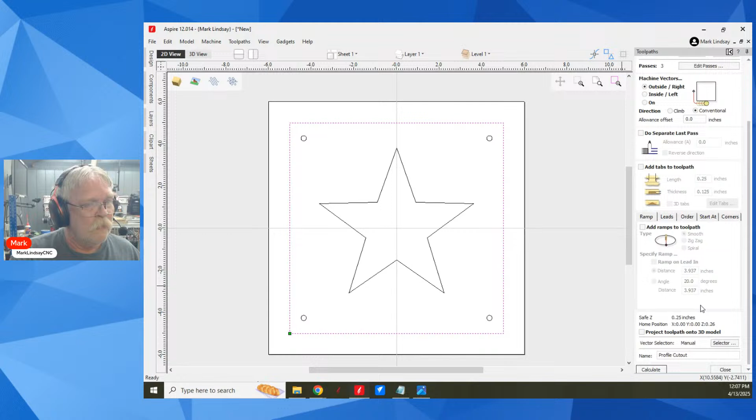And I may do ramps. I am going to check to make sure that I have sharp external corners checked here. That's important. Okay. I may or may not add ramps. Sometimes I do. If I do a separate last pass, I always add a smooth ramp. Okay. So that's what we're going to do. That's all of the tool paths involved in this simple pattern.

Now, in grouping tool paths, you can do them in several ways. Well, there's a couple of ways. One is you can take all of the tool paths here in your toolpath list, and you can group them based on, well, the criteria can be your own, more or less. You can create a group that uses, for instance, they all use that 1/4" end mill. I've got 1, 2, 3 different tool paths that are going to use that 1/4" end mill.

So what I can do is down here in the blank space, I can right click and I can create an empty group. So I'll create that group right there. Now, there is a check mark, meaning that this is a visible group, but there's nothing in that group yet. But I can come along and I can drag my drill toolpath into that group. And you see how it comes down here and it shows the drilling toolpath is now moved into group 1, it says. Then I can take my clearance and I can drag that in.

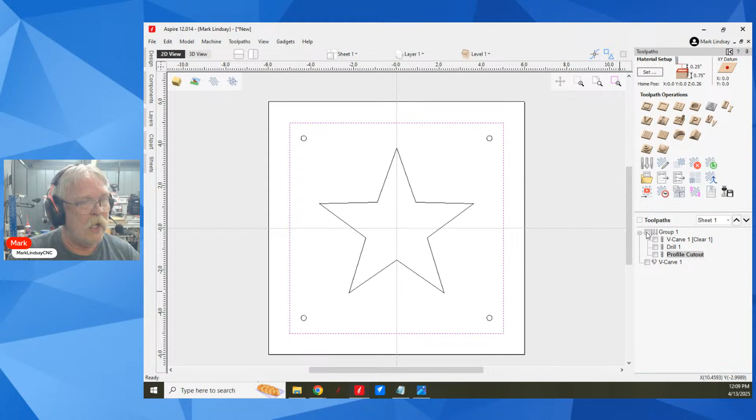Then I can take my profile cutout and I can drag that in. So I have taken all 3 of the tool paths that use that 1/4" end mill, and I've placed them all into this one single group. So now when I turn on the toolpath and make it visible, we can see that I have them all selected out here.

Now, what this means in this context is when I go in to preview the tool paths, I'll select this name, group 1, and you know what? Let's rename it. I'm going to rename the group 0.25" end mill. There we go. I've got that selected. Now when I go to preview that selected toolpath, it's going to go through and it's going to preview every toolpath in that group.

Now I can see one mistake already, and that is I've done the V-carve clearance, I've done the drilling, and I've done the profile, but I still have one more operation to do. So what I'm going to do is I'm going to reset the preview because I do not want to run my profile cutout before I finish all of my operations.

So I'll select the V-carve toolpath, and I'm going to use my arrows up here, and I'm going to move that to the top. So that will be the first thing done. Okay. So if I preview all toolpaths, it's going to do the V-carve bit first, then come back and do the clearance, then it's going to drill those holes, and then it's going to do my profile cutout.

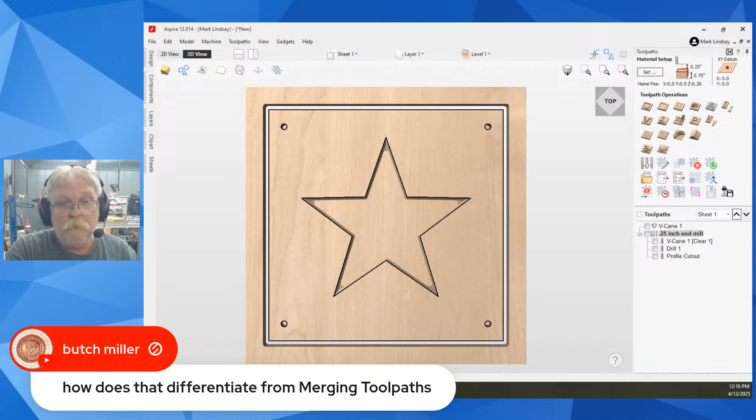Okay. Now, Butch has a follow-up question that I missed up here. How does that differentiate from merging toolpaths? Excellent question. Let me get something done here. To take something out of a group, it's simply drag and drop. So I can select the drilling toolpath and move it up here above VCarve 1, and it's no longer in that group. Then VCarve clear, and then I'll take out profile cutout. Then I have an empty group. So I'll select it, right click, and delete this empty group.

So now I have them back in an order that I would use. I've got drill as number 1. It uses an upcut bit.

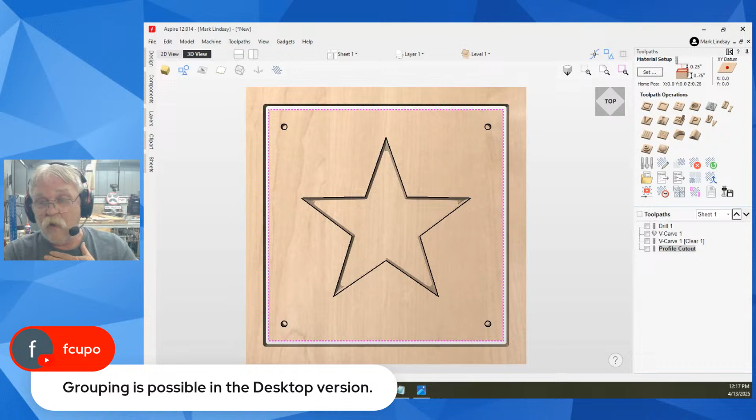Oh, here we go. F. Cupo says grouping is possible in the desktop version. Okay, thank you very much. I don't have VCarve Desktop, so I couldn't comment either way. But thank you for that. I appreciate it.

So then I would swap out my upcut bit. Then I would put in my 90-degree V bit, and I would carve the 90-degree V bit portion. I almost always do the V bit first if I'm carving with a clearance bit. Almost always. This is especially important if your carving is going to leave thin pieces out here.

You'll find you get a lot less chip out if you do the V carving first, then come back and do the clearance. Okay? So I always do the V carve first. Then I'll come back and do the clearance. Then I'll come back and do the profile cutout.

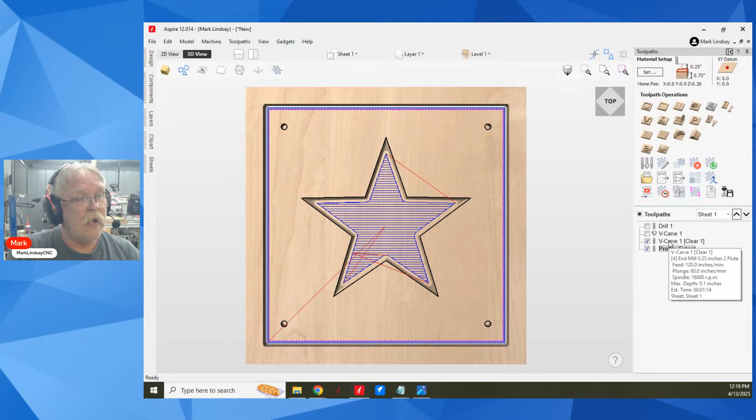What merging toolpaths does is it actually takes, let's go ahead and use vcarve clearance and profile cutout. Then I'll right click and it's not here. Oh, I can group the visible. That's fine. No, I'm going to merge these toolpaths and it's up here. There it is. Create a merged toolpath. What it's going to do, it's going to take the 2 that I have selected. Okay. Vcarve clearance on top. That's important. And then profile cutout.

Select one or more ordering approaches to try. If more than one option is chosen, the option that results in the shortest rapid move join-ups will be used. So I can order these to go left to right, bottom to top, or the shortest path, or in a grid, or merge by part. Let's try shortest path, because we see all of these red lines out here. These are rapid moves.

Okay. A rapid move is a move where the bit is not down in the material, it's moving over the surface. So if I merge them using the shortest path, it's going to try to reduce the number of rapids going from one to another. Now, that's not really going to help a whole lot in this case because one's in the middle and one's way out on the perimeter. There is going to be a long rapid move. But merging them will take the two of these tool paths, figure out the shortest method to get both done, and then combine them into one tool path.

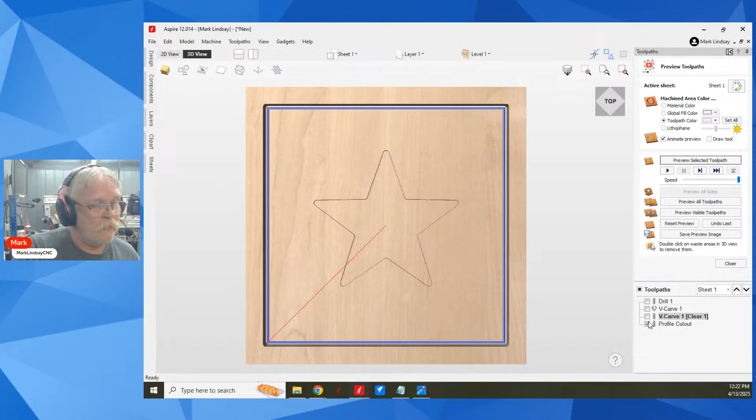Let's see here. I can ungroup, and that brought my V-carve clear and profile cutout back out of that merge. So if I select profile cutout, V-carve clear, and drill, that means I have to use the same upcut spiral for all of this because you do not drill with a downcut spiral. I close the preview. We'll go into merge toolpaths, and it's going to merge them in this order, but it's also going to take the shortest path to get it done.

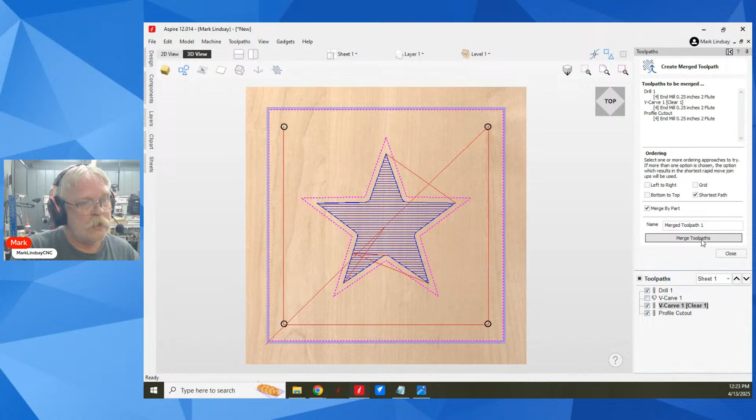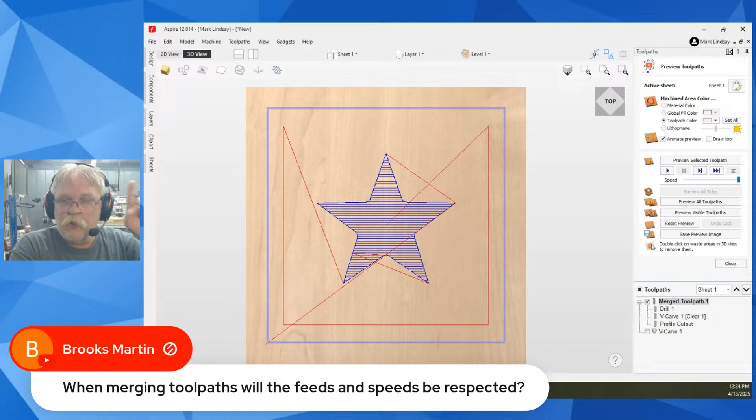So I merged these tool paths, and what it did was it combined those tool paths to one G-code file. But again, it didn't just take the drill tool path, then add the V-carve clearance, then add the profile cutout. That can be done when saving G-code. And Brooks is asking, when merging tool paths, will the feeds and speeds be respected? Yes, it will. But again, they do have to be the same tool. It will respect feeds and speeds.

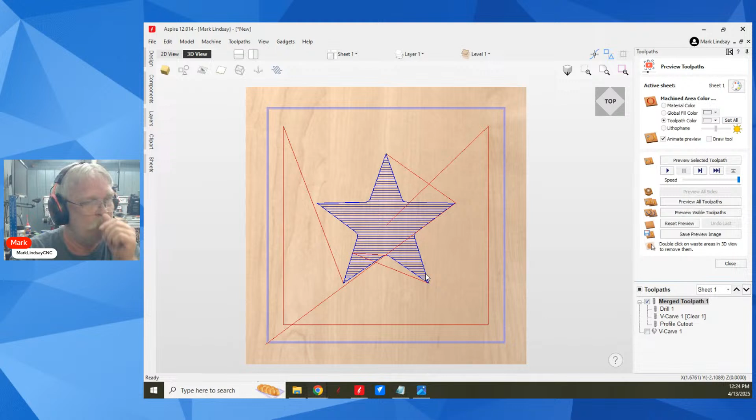So it may come over here and do this, then jump up and do the drilling. It may clean this out, jump over and do a drill, then come back down and get down here. When it gets over here, jump over and drill. It's not in this case, but you get my point. It combines them all. It doesn't just do one after the other. Okay. Another thing that it does is, let me close this, take that off. And well, they're merged. They're no longer separate. So I can't select them.

If you have ever selected the visible toolpaths to one file and then run it on the machine, you'll know that, for instance, it will do the drill, then lift up, then there's a pause, then it shoots over, it starts the next G code, and then finishes that, then there's a pause, then it'll come over and do the next G code file. This doesn't do that. It moves smoothly from one to the next.

This merging tool paths comes in handy when you have, again, a lot of tool paths that use the same tool, and rather than cutting over here for a little while, then moving over there and cutting for a little while, and then coming back up here and cutting for a little while, it'll take care of everything up here, then move over, take care of everything there, then move over, move there. Depending upon how you order them, it can move left to right, top to bottom. You can have the shortest path, or you can use a grid. Okay.

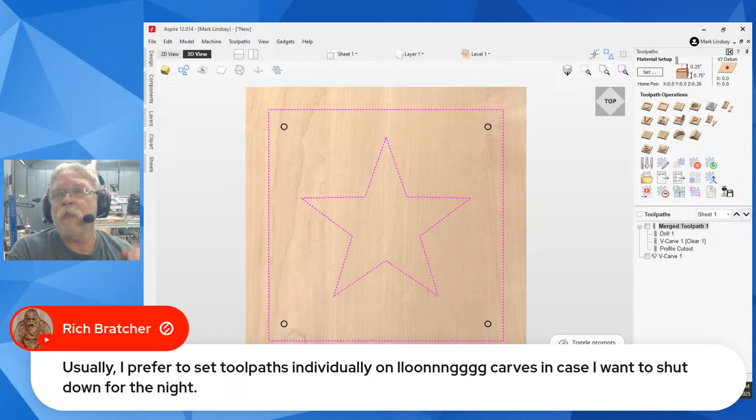So merging tool paths does help, especially if you're in production work. But it's just one more tool you can add to your arsenal. Now, Rich Bratcher says, usually I prefer to set tool paths individually on long carves in case I want to shut down for the night. I do the same. Generally speaking, I like to be the one in control of when I'm going to cut what, because I may get a late start and get these done, then decide it's time for lunch, go in the house, have a sandwich, watch a YouTube video, then come out and do my V-carve.

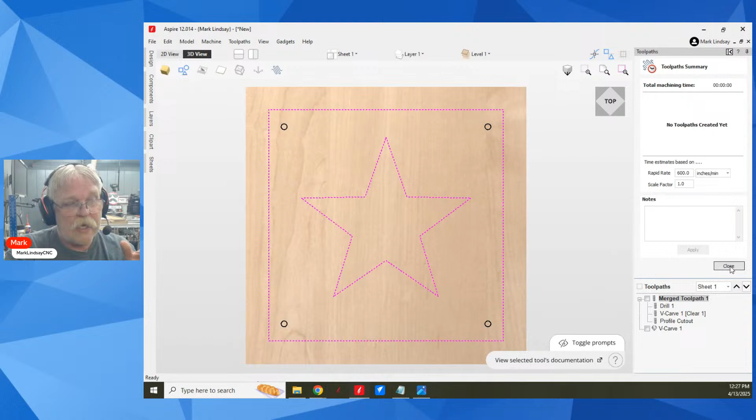I know there are ways I can stop it and then restart, but I'm one of the old school folks who doesn't want to leave it unattended. Too many bad things can happen when you leave a machine unattended, you know? And maybe I err on the side of caution, but that's just me. I'm old school like that, you know? So, anyway, that's the difference.

Grouping tool paths keeps each tool path separate so that it can be previewed one at a time or machined one at a time. Merging tool paths combines it all into one long tool path and adjusts and merges all of the G code. So if it's working over here, it's going to drill a hole over here, then V-carve over here, and then slowly make its way around. Well, not slowly, that depends on your feed speeds and rapid movements. So let's see here.

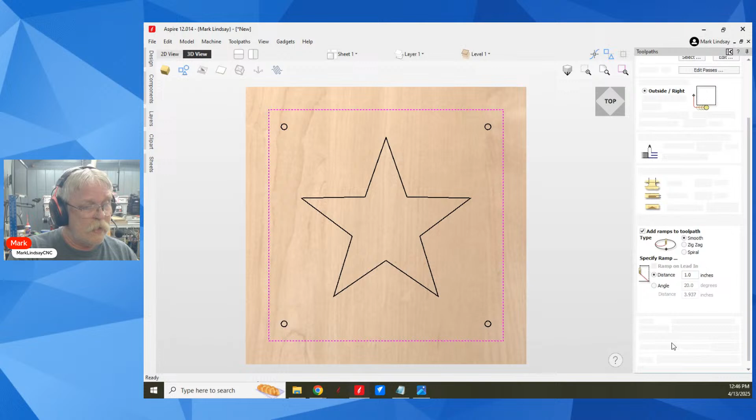Okay, Pete over at Nature's Live Edge says, I think you can modify it while it's in the group. Well, let's look. While it's in the group, let's look. And let's see, profile cutout that's in the group. I'll remove the tabs and recalculate. Okay, yes, you can modify while it's in a group. I don't know that you can modify it after it's been merged.

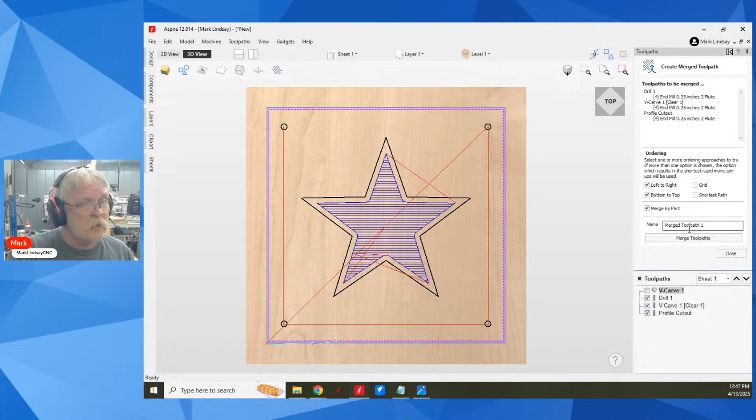So let's see. Let's go ahead and boom, boom, boom. And we'll drag these out of there. Nope, got to do one at a time. Okay. And then we'll delete this. All right. We'll get rid of the group. Now let's go ahead and merge those tool paths. And I'm gonna take that off. We'll go left to right, bottom to top. And we're not going to do that. And we'll just merge them.

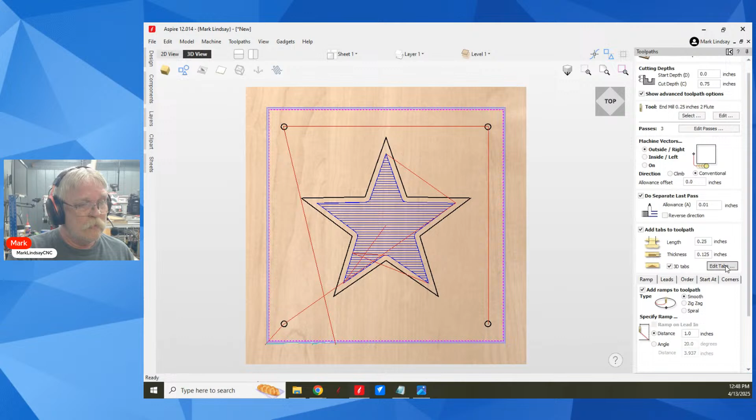Okay, that's fine. The resulting merge toolpath will not necessarily preserve the current toolpath order or the cutting order within an existing toolpath. Okay. All right. So it's changed that part. Now let's see if I can go into profile cutout and change it. Now I will add tabs, and they're there where I put them. Close and calculate. And yes, they're still within the merge toolpath.

So yes, you can do that. All right. Thank you, Pete. I was taught that you had to take it out of the merge toolpath in order to modify it. So yeah, thank you. I appreciate that. Now let's see here.

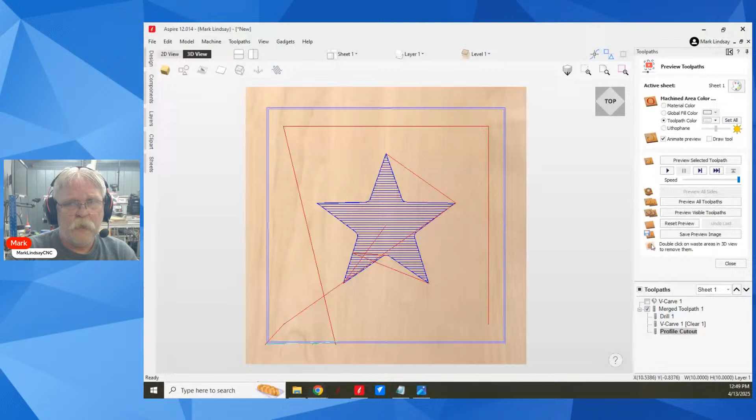Jack Painter says, is there a place to have the spindle start and stop in the program, or do I have to edit the file and enter the G code? Are you talking about, for lack of a better term, a parking spot? Like if you're finished, let's bring this back over here. You're finished with this and you want the spindle to come up here and then stop to go through its shutdown. There is a way to do that.

Generally speaking, within the G code. Okay. You can change the home position. All right. And here's your home start position. When the toolpath starts, when you hit cycle start or run or whatever on your controller, no matter where your spindle is, the first thing your CNC is going to do is move to that home position. In my case, it's X0, Y0,

0.25 above the material. Okay, the bit's going to be 0.25 of an inch above the material. Then it's going to start running the G code. When the G code is finished running, it's going to move back to this home position, X0, Y0, 0.25 above. Now, if you don't want it here, you can make this anywhere you want it. But remember that when the toolpath starts and stops, that's where the bit is going to go. Okay, so you can set it up.

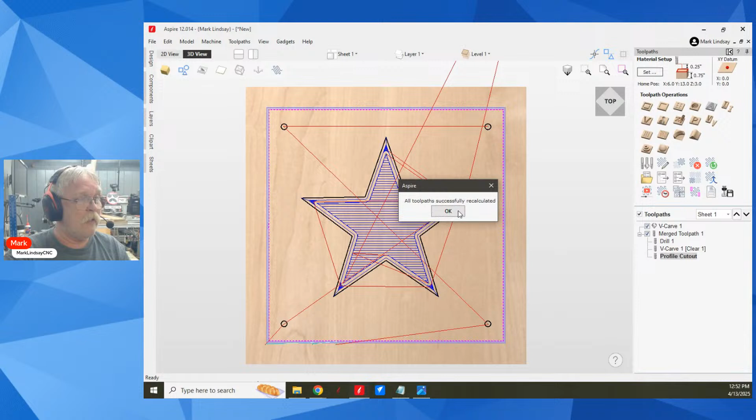That may be what you want it to do on this project. But the next project, you're going to need to come in here and change this unless this is exactly where you want it to start from and end. Okay, I've reset my material values. Now I've got to recalculate the tool path. All tool paths are recalculated, and now there we see.

There's the home position. I thought I had my XY0 set here, so I thought it was going to come over here 6 inches. I forgot my XY0 is here in the center, so it's 6 inches over this way. Okay, so you see way over here, that's where that home position is. That's where it's going to start, and that's where it's going to stop. If that works for you, then terrific. Excuse me. If that's not for you, then you might want to change it.

The only thing I would caution you on is if you're going to use this system, and again, that's right here in Material Setup, click the Set button and come down here, the Home Start position. Okay. The only thing that I would caution you is be very careful, because if you use clamps especially, or you have this mounted in a fixture, when it's finished doing its thing and it's time to go home, it's going to go straight home. It doesn't care if you've put a clamp there. It doesn't care if there's something in the way. It's going to go straight home.

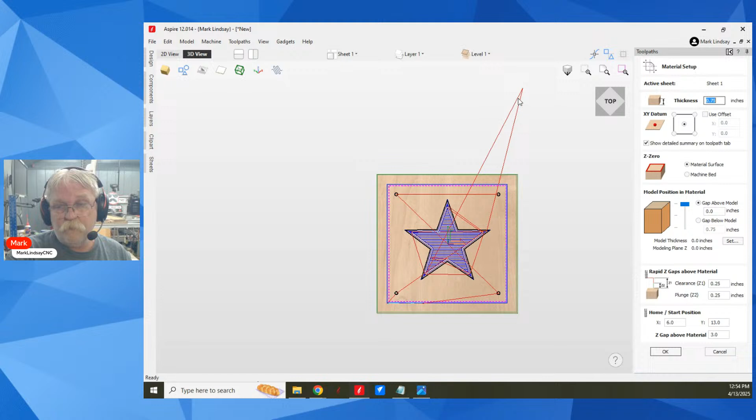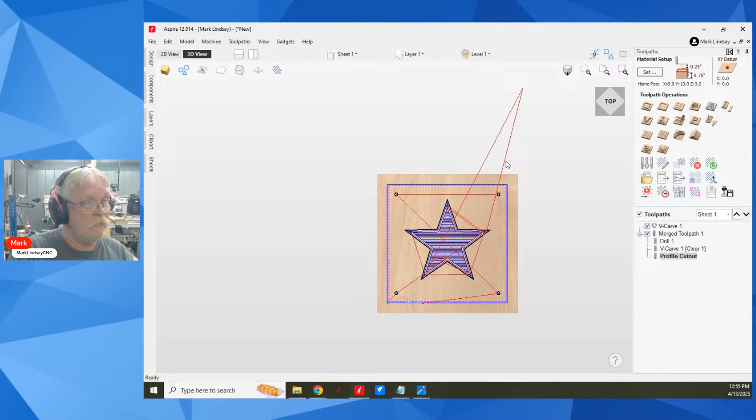Now I know, let's cancel that. There are keep out zones. One of the issues is when it goes to that home position, it ignores those keep out zones. Those keep out zones are only valid while the bit is out here carving. When it's done carving, it'll go right through that keep out zone to get back to home position. A lot of people don't like that, with good reason, because if there's a clamp or you've got a fixture with toggle clamps there holding down your material, it's going to go right through one of those clamps. So you've got to be careful. Okay.

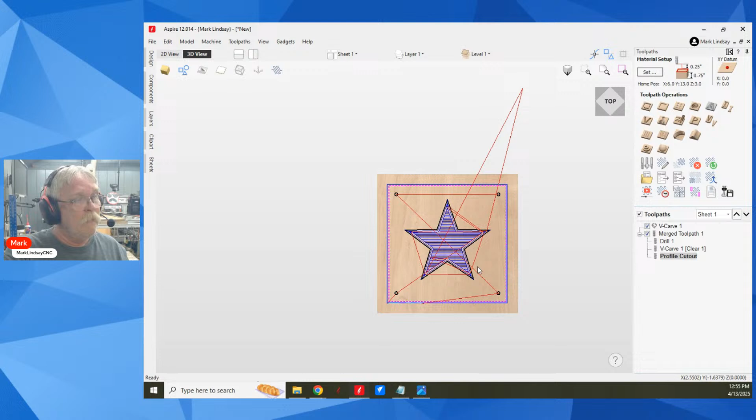This is one of those situations where you can, let's shut that off, come back in here. And let me see, I don't think I have a piece of G code on this computer. Let me remove that. And I apologize for the silence while I look for a piece of G code. Come on. Open up the folder. There we go. Let me see. Do I have any G code here? No, none there. I need to get me a piece of test G code. Is that one? Yes. Okay. So, all right. Here we go.

This is a G code file for those of you who don't know what G code looks like. Okay. You can come down here to the bottom. I know just enough G code to be dangerous. Okay. What we have down here is that's returning to the home position. Okay.

G00, which is a rapid move, Z.25. That's going to lift my Z .25 above the material where my Z0 is. Then this right here, that's a move to that home location, X0, Y0. Then M5 turns off my spindle. M9 turns off my dust collector. M30, the end of the G code, and then return to the top.

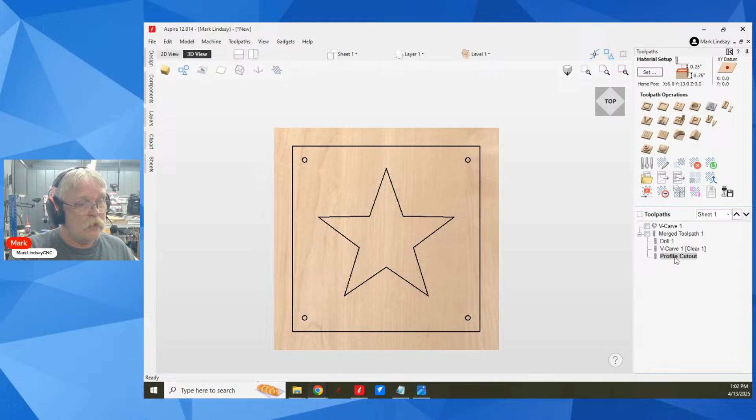And it doesn't have to be a 1/4 of an inch. You can have it go to, I don't know why it's here twice. I'm not going to mess with it because it works. You could have it lift up by itself. You could set that height to wherever you want. Or you could make sure that in your material setup, it goes up to a high Z gap.

The only problem with playing with this Z gap here is when I've got a Z gap of 3 inches. Cancel. That means when it goes to run this path, when it lifts up, it's going to lift up to 3 inches. So everywhere you see a red line here, when it comes out of the material to move, it's going to come up 3 inches, then move, then come back down that 3 inches, and then go to the correct cutting depth. So this isn't just for the home position.

Okay. No, take that back. That is just the home position. Forget that. That's Z1. Never mind. Forget I said any of that. This is just the home start position. Your Z1 clearance is going to be up here. Never mind. Forget it.

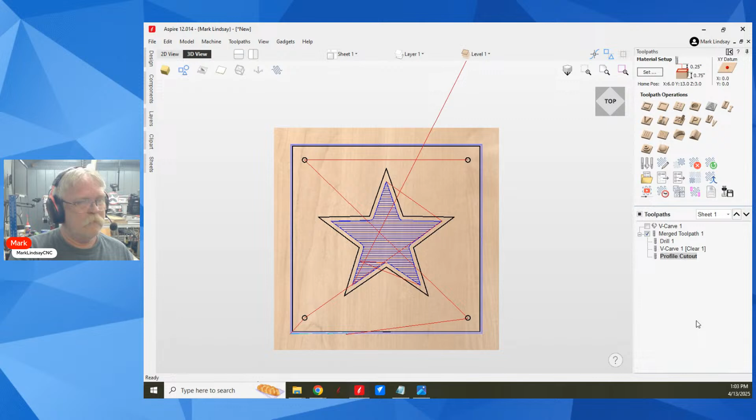Do my Rosanna, no, what was it? Not Rosanna, Rosanna Dana? I don't remember. Never mind. That's how old I am. All right.

Let's see. Ellen says I set mine to 0.08 unless I have very thick material. Yeah. I set mine at about a 1/4 of an inch. That's enough to sling off any chips that might be stuck to the bit, and it's a safe move across my material. So let's see here.

I have not used keep out zones. I just have to be aware of where my clamps are. Yeah, and again, that is a good case for removing that line of G code that tells it to make a rapid move to go back to the home position, because wherever that last cut was, it's going to stop right there and just lift up and then shut down. So, you know.

Yeah, Roseanne Roseannadanna. Thank you, Rich. You're old like me. All right. It's always something. Okay.

Let's see. Ed says, I know with gSender you can put G code for various functions, such as pausing, resuming, for example. To resume, I can have the spindle start and pause before proceeding. Yeah. Yes, you can. And that pause is called a dwell.